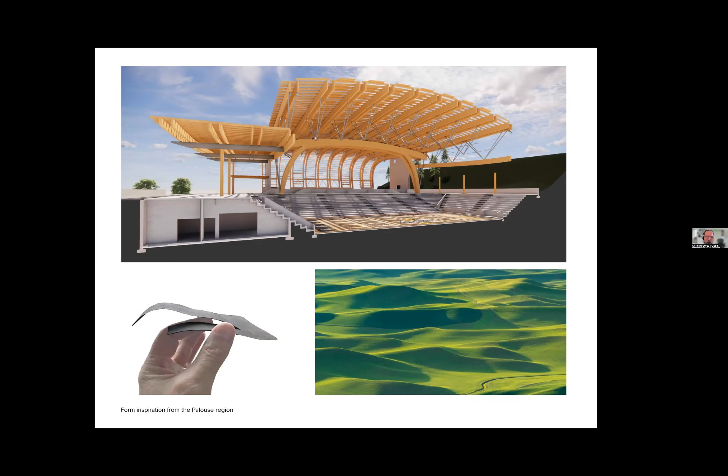Of interest here, you'll notice the 12 rows of king post trusses were a really prominent fixture, and then the portal truss—I like to think it looks like pi, if you will—that carries about 400,000 pounds of load from the roof structure and distributes it amongst the bowl. This is an east-west section, again looking at how we wanted various expressions of the mass timber wood structure.

Conceptually, we conceptualized a simple angular box, if you will, for the program elements like the courts, locker rooms, offices, etc.

And the idea of this roof structure kind of draping over and covering the various programs, wanting to have a kind of expressive greeting out to the west, which is on the right-hand side of the screen here, and that looks out to the Palouse.

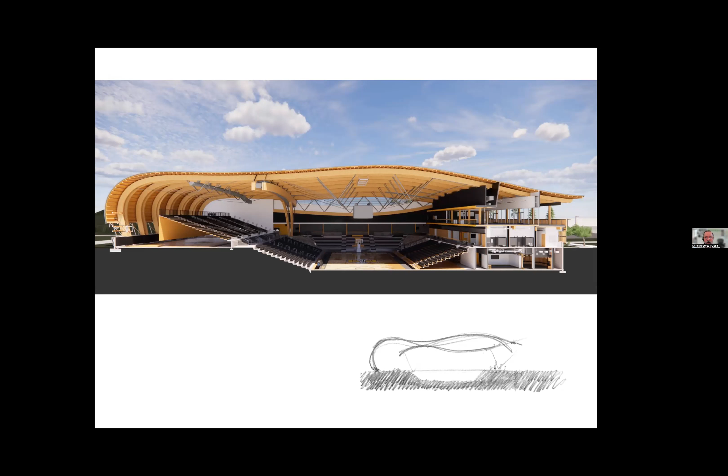Kind of where the experience, we like to say, comes full circle. And then on the campus-facing side on the left here, the idea of maybe looking at a different expression, one that was more grounded. Again, this is playing with the early sketch you see here of ways to integrate it, anchor it into the landscape, but at the same time express itself outwardly as a new kind of gateway to the east side of campus, which is part of the athletics precinct.

Here's a kind of before and after shot. So the early kind of just looking at a structural wood model of how the structure might work together in harmony to sort of address these various site forces.

And then the contextual image you're seeing here is the north side of the arena, the large beer can in the background there - that's the Kibbie Dome, which is a 16,000 seat football stadium, and we're just directly adjacent to it. This was on a greenfield site, just to the north of the Kibbie Dome.

A couple main site issues we were dealing with here: just off to the right in this image is a massive parking lot, with a lot of student parking and event parking to the west. Our location created a new campus gateway, both vehicularly, as you can see the road in front, but more importantly, the pedestrian student access - it's a primary circulation route to the heart of campus.

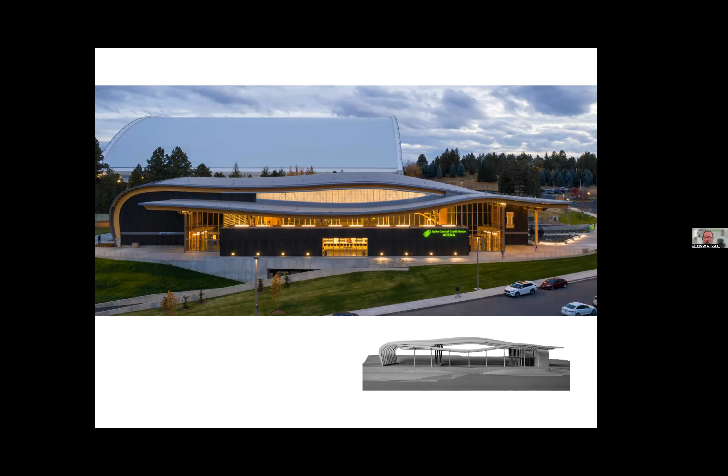So our entry plaza kind of swings around to the north side of the building. As you walk past, you get to see views into the facility. It's very open. We took a different approach, breaking out of the typical steel and concrete boxes that form the general framework of this building typology, and tried to create something warm and inviting. So the use of mass timber and open glass, again all facing north.

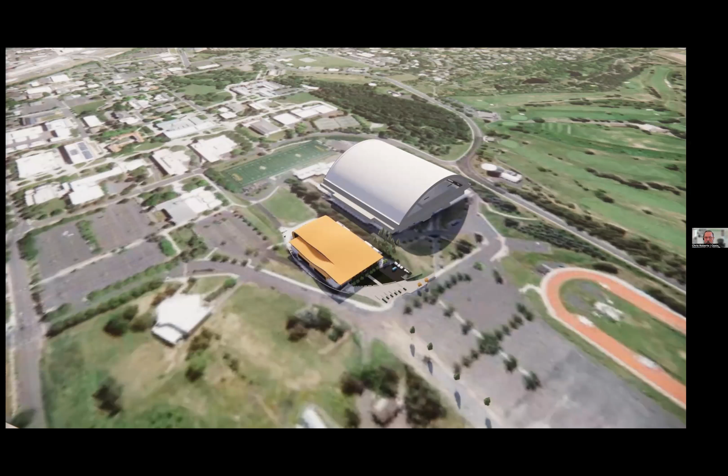We're really able to control the daylight there, but also wanted to always have the action on display. Just contextually, here's a little site plan perspective showing its location and proximity to the Kibbie Dome, and you see the campus in the upper left-hand corner, and the parking lot to the west. You get a sense of just how it sits on campus, and the stadium drive which runs by the edge becomes the gateway for all the movement as you get more towards campus.

We looked at it basically as a 2-level building with one level below, so a total of 3 levels. We put all the program locker room spaces, storage spaces, and wet mechanical down on this lower level. And that funny little squiggle off to the left is our loading dock area, as you come in to get direct access onto the floor.

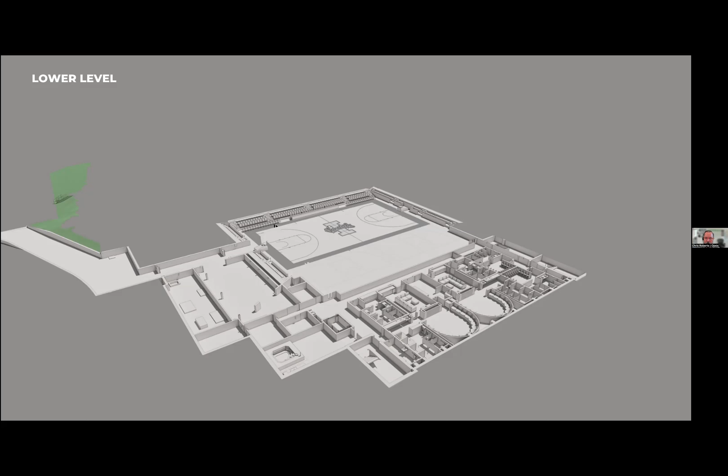By sinking the footprint down basically 14 feet below grade, it allowed us to really take advantage of our main level, or concourse level, circulation. This begins to show some of the angularity, or the simple program boxes I was talking about earlier that form the framework of the program, but then get more expressive as you move up through the building. At the concourse level, you're at grade, and this allowed us to really open up the space.

We really wanted to always be able to experience the mass timber while you're in the arena, and never leave the space. So there's no traditional vomitory that you would walk through into the space, with a separate concourse and performance area - it's all one space and all open to the structure above.

So wherever you are at any time, as you're making your way down to your seat, up from the seat, going to the concessions, going to the restroom, you're always kind of in the middle of the activity and always a part of that environment.

So we've got what we call the concessions block, which is on the left-hand side here, as mostly concessions and restroom areas that open directly out onto the concourse. And then the larger office space is all their basketball operations. We also have a lot of the residual restroom spaces, men's and women's, built into that as well.

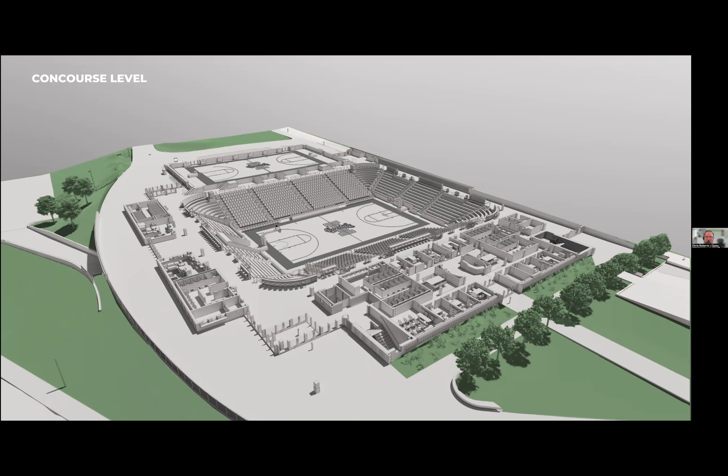And your vertical circulation is at the 2 west corners that take you down into the locker room area or up to the club room area. This just kind of diagrams the flow of traffic.

Then on the upper level, we've got an alumni room club room. The University of Idaho's alumni didn't have a home, so they participated in the project. On a regular daily 9 to 5 Monday through Friday, it's home to their alumni, giving them a place to congregate, gather, and meet.

And then on game day or game evening, they switch it over to become the club room, and you can see there's a row of loge seating out to the front of that. Kind of a great view, overlooks the courts, provides another price point for revenue generation.

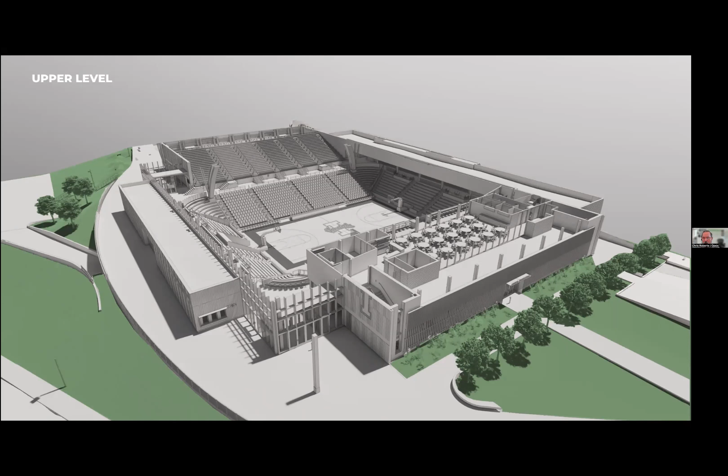One of the nice features about this upper level is it has a large, what they call the Vandal Terrace, an outdoor deck that overlooks the primary entry into the arena, but also has views out to the Palouse beyond. On the bar over on the upper right-hand side, that's where all of our mechanical equipment was located, so we located the mechanical on this level and then feed that into the arena.

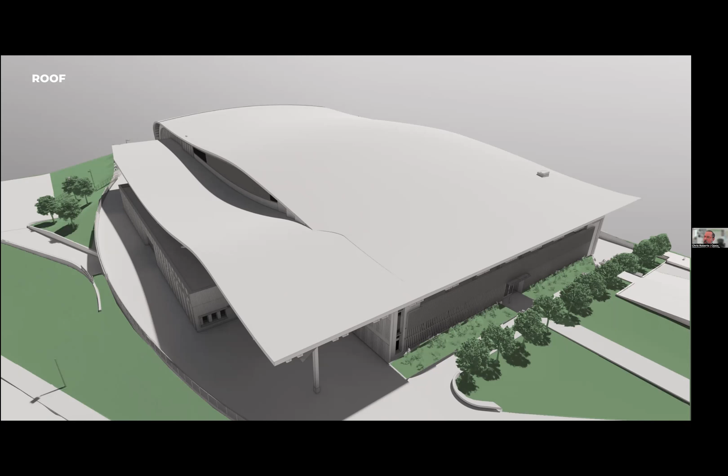The roof just drapes over these program areas, expanding or contracting volumetrically depending on the program area requirements below. That's why we've got the higher level over the central performance court to give us the clearances we need, but then it lowers itself as it gets over the concourse level to provide a more intimate experience for people in the arena.

We worked really closely on this project with StructureCraft out of Abbotsford, British Columbia. They came on in schematic design, and for anyone online who's worked on mass timber projects, your partners are a key component in being able to do this type of work, particularly when you're trying to stretch the limits and capabilities of what mass timber and wood design can do.

Here we really focused on going long span. It's definitely not a project where we're looking at going up and doing office space, so it was a different kind of twist on the mass timber formula. StructureCraft came in—we actually brought them in as a design build partner in schematic design—and that helped give us cost certainty, which was really difficult with multiple subs as we looked at the hybrid structure with multiple components.

Their excellence in design and their input helped see our vision through, and they were also able to coordinate with other mechanical and electrical systems within their main systems.

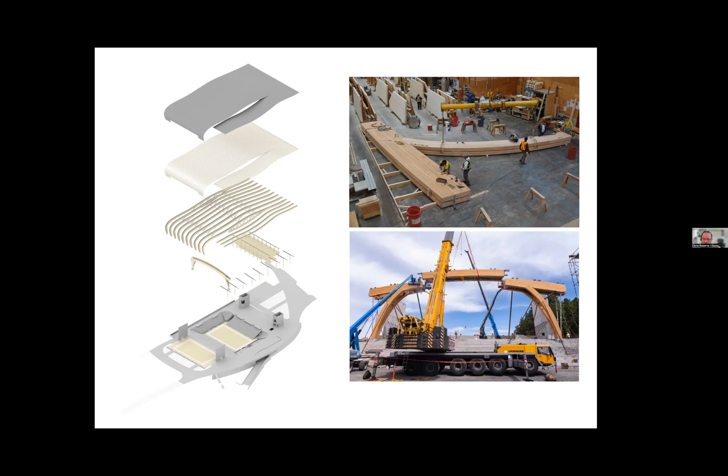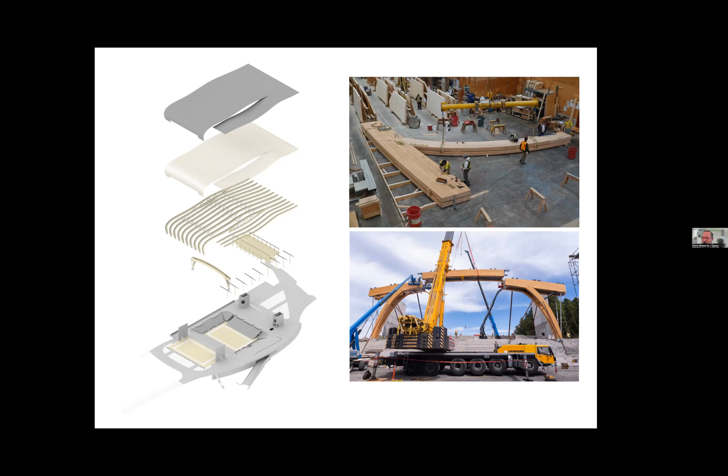You're seeing their shop in the upper corner there when one of the portal trusses was under construction, and then you're seeing the keystone lift of the central part of the portal going in. If you squint and look really carefully, you can see the gray between the double glulams there—that's where we ran our utility or mechanical highway, where we ran everything because we wanted to conceal all the mechanical work to the greatest degree possible to not take away from the wood structure.

Again, utilizing some natural daylight to bring into that space as well. We also looked at the fissure between the two roof planes as another opportunity to maximize natural light into the space and minimize the need for lights to be on when they don't need to be. It was part of our sustainable energy saving measures that we were looking at in the project—again, going against the typical way these projects are approached.

We were thinking about the experience - if you were out in the Palouse, inside the rolling hills, what would that experience be like? We tried to imagine what that could be, this warm little cavern underneath.

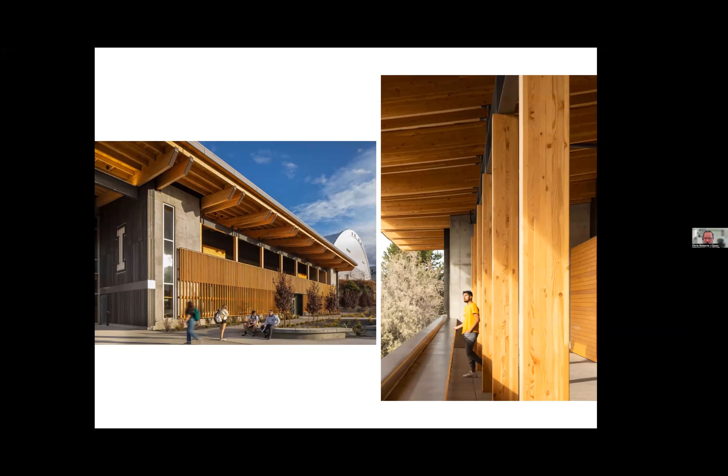If you look to the right, the gentleman is looking out into the Palouse, and that guardrail system sits on top of that wood slatted wall. The ability to always be in touch and around the wood was a primary driving factor in the design.

This is looking at the main west entry, with a small ticket office off to the side. You're seeing the vertical windows at the stairwell. We also utilized the donated wood siding to build into their I logo at the entry.

The coloring was really inspired by a lot of the old, dilapidated farmhouses that have been around for a century or more, tying into that concept - the agrarian architecture of the region.

You can see in the concourse the various components - this is the corner of the concourse. You get a sense of the overall experience, where you're always in the space and always able to appreciate or participate in the wood structure.

Interesting little tidbit here - you'll notice the steel struts, those gray struts ascending upward from the portal truss. It's one of the few areas we had to use intumescent fireproofing. Ironically, in our wood structure, the steel is the weak point from a fire protection standpoint.

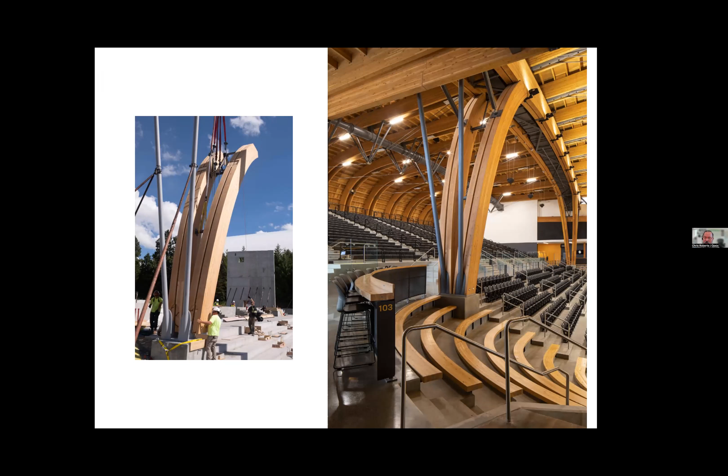You'll also notice, to get the sight lines working with the expanded bleacher seating up above, we raised that about 4 feet off of the concourse level, so you could always see the game and not be blocked by people walking in front, which ended up being quite a challenge for the seating manufacturer—one of the tallest portable bleachers they've ever had installed.

It's kind of just looking at cross court there, again, looking at the natural daylight, both the curtain wall and the clear views out to the surrounding context, to campus and trees.

And this is up in the low seating area, in the upper left-hand corner office area—what we would call the closing room, a place for coaches and players and recruits to meet. It's got a direct connection to the office, but also views out directly to the court, which is kind of a new feature.

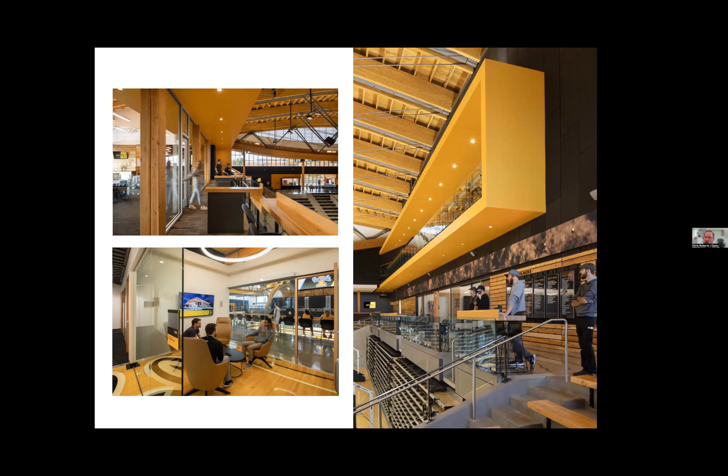We were also able to repurpose their old portable court—that's what you see as the floor in there. So we took center court, and that became the central entry of the basketball operations.

Here's another view looking back the other direction, where you can kind of see the curving wood structure embracing the stands, or the portable bleachers, as well as the practice court, and just get a sense of the overall space, and a pretty good view of how we tried to minimize the visual clutter.

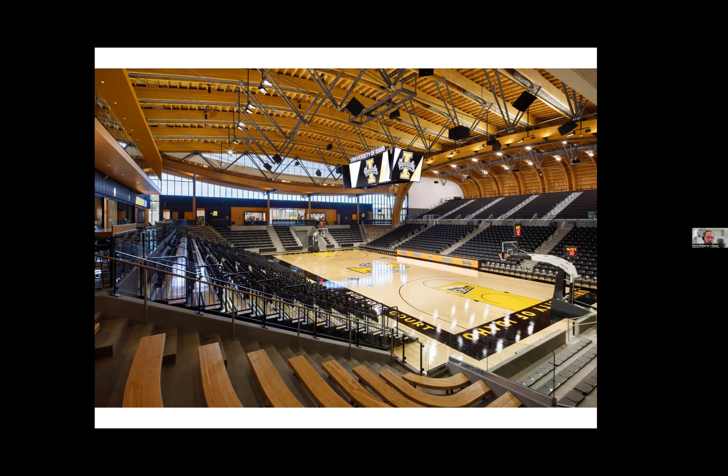There's always going to be some clutter, with things like the speaker clusters and the need for very precisely located performance lighting on that side, but we tried to tie it all together.

And then on this side, toward the end here, we're just looking at the various materials, trying to be very simple and purposeful in their expression.

The dark charcoal stained wood siding, which we did a variegated patterning on, has that sort of rougher, darker texture juxtaposed to the lighter, clean, clear-sealed glulam beams, and then the expression of the standing seam metal panel there.

So this would be how a student or someone coming from campus would approach the building. One last note on the practice gym is the idea of revealing the structure, even when we were covering it—being able to always have some kind of contextual relationship to it.

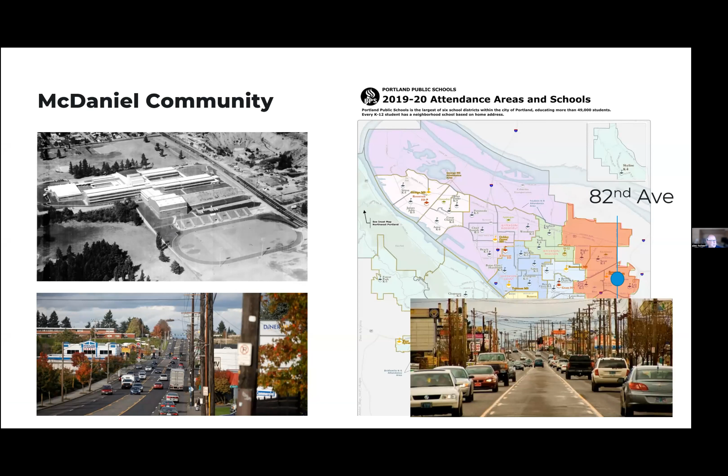A little bit about 82nd Avenue - many people know it as a State Highway, but it's just about become a city street. Historically it was on the edge of the city, but much more in the center of things today. A busy place, and many people did not know that Madison High School actually existed and where it was.

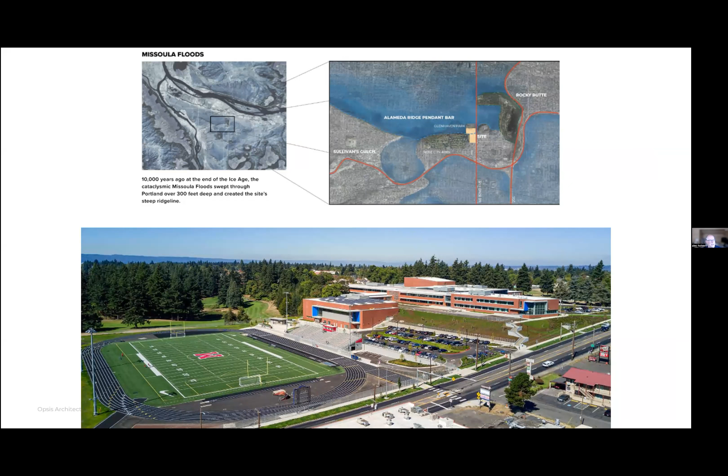Interestingly, the Missoula flood came down and created the Alameda Ridge that this sits on. So we had a really significant, close to 60-foot drop across our building site from the fields up to the top. So while in some ways it's a 2 or 3 story building, it's actually like a 6-story building, which added a lot of complexity to the space planning and organization of the building.

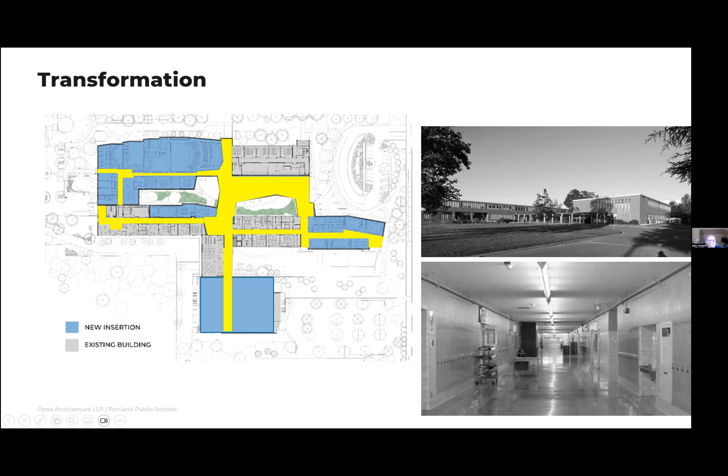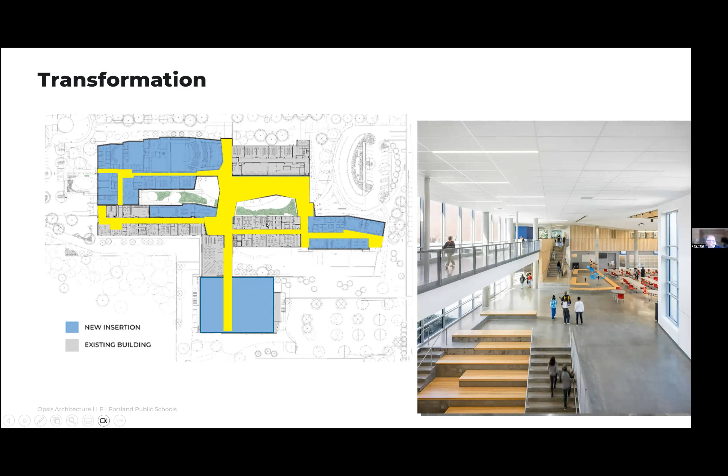So what we really did is we took this building that had a lot of different pieces, and we disassembled and took away all these areas of blue and created this new connecting tissue through the building, added these major areas in yellow to the circulation space, and filled in half of one of the existing courtyards and enclosed both courtyards because previously they had been open and completely unused.

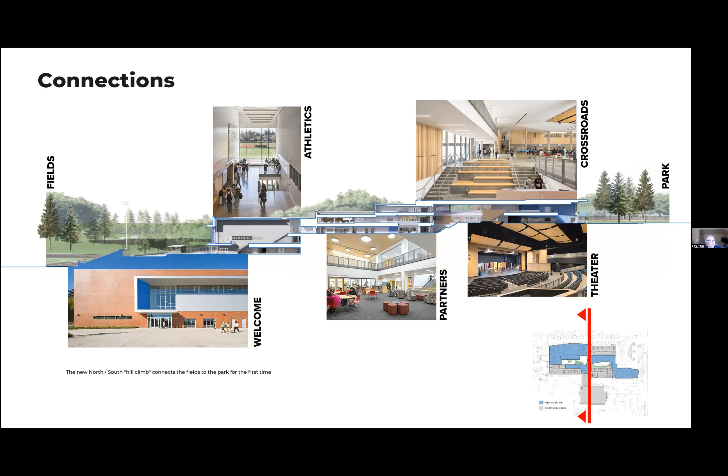In fact, many students did not even know there was a lower level or how to get to the gym from within the building itself, because they were just through dark stairways.

That process involved a lot of hands-on work with our very large 35-member citizens committee - students, teachers, parents, community members. We used models, physical models, all sorts of things to connect with people, to talk about what these spaces would be like, and particularly how we could create what was called the crossroads, and create a center and a place on this campus that did not exist in the past.

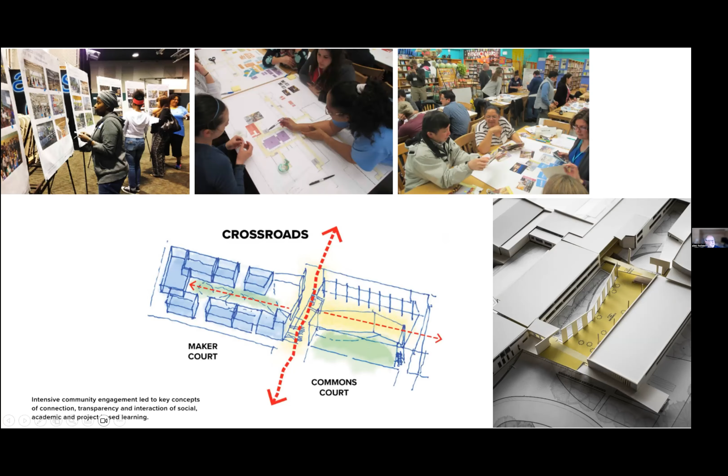The idea of this central commons courtyard was really an inside version of the outside social space. At the very heart is the crossroads, which became this place where you could stand and actually see almost every aspect of over 300,000 square feet, or at least a direction to hit one of those areas.

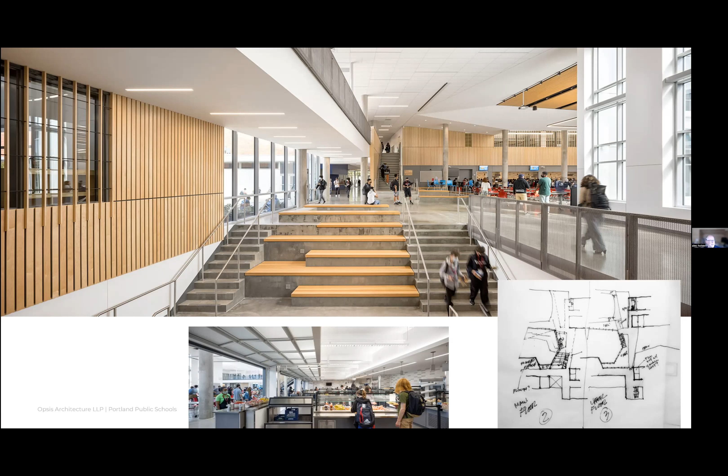And it has in fact become that. The principal stands here at the center of this picture pretty much every day and sees those students passing, and is able to really make those connections through seeing everybody that comes in.

I think this is kind of what it looks like on a daily basis. It really has been successful as something where students now have that sense of movement and connectivity through the building. It's really fun to actually see a building like that open and see everybody doing what they're supposed to do, at least we think they're going to do.

One of the issues that came up was how do we represent those diverse communities. We met with different groups within the student leadership, leaders from each of their cultural and ethnic groups on campus that have organizations. One interesting thing that came out, working with Mayer/Reed on the graphics, was creating graphics that didn't represent individual groups, but instead represented common themes of change makers, using diversity, color, texture and pattern versus calling out specific groups within the campus.

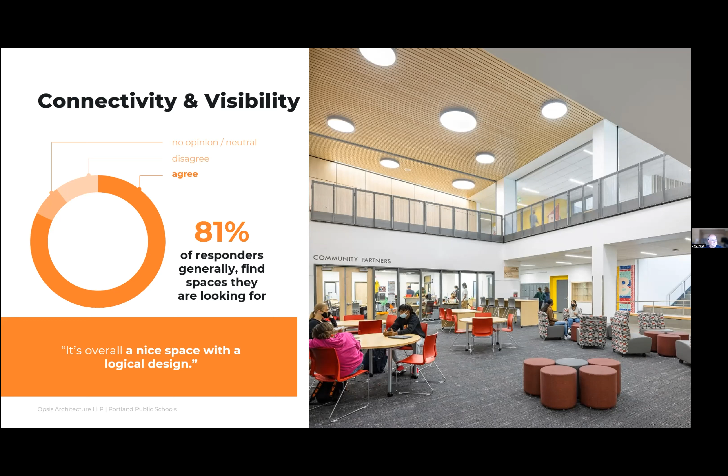So that was kind of an interesting reveal of what we thought originally might be a concern, but wasn't. The big part of this project was to take the community partners, which in the past and in many schools are relegated to the outskirts of the building or to the basement, and bring them right to the very center of that crossroads. On the level above this is the library, the crossroads to the right, the community partners, the SUN programs, all the different programs that support these students, and an informal work area that spills those out, so that those programs, which are so important to student success, are right at the heart of the school rather than a secondary aspect of the learning environment.

Another interesting aspect of this was how we dealt with CTE, another program which often is pushed to the outside, to the wing or somewhere on a building. Here the idea was to bring it right into the heart. So the crossroads there on the right, right off of that, there's a STEAM courtyard, and around that are the wood shops, the technology spaces, the art spaces, the theater spaces, and a series of flexible garage doors. There are four of those that open into flex spaces, workspaces that all open into the courtyard.

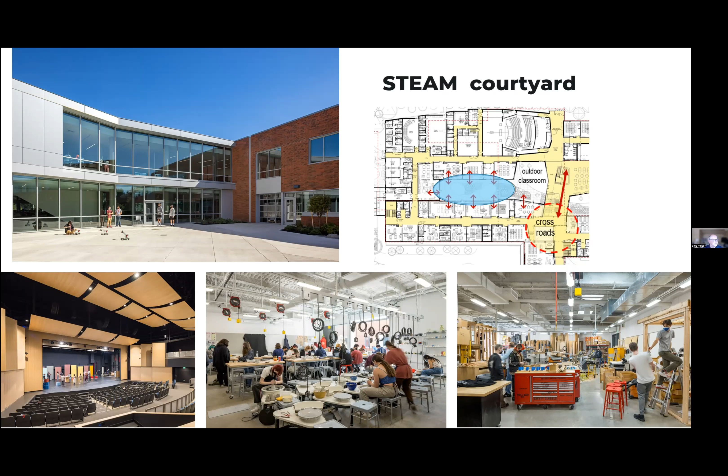And if you go there, this space is actually one of the most fun. They're building small houses there. They're doing robotics in that courtyard. It's an enclosed, secure space. It's just a hive of activity, and it's immediately visible right into the main common space. So CTE is put right on display, right there at the heart of the school.